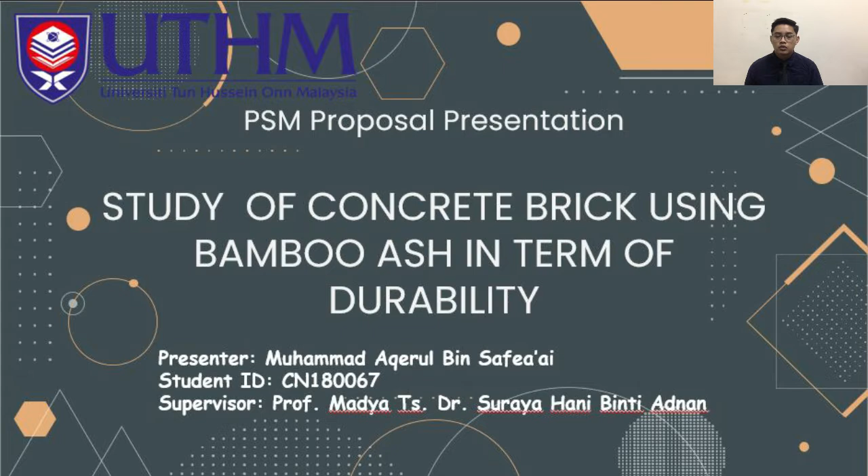Chapter 1 is the introduction. Background of study. This study is actually to reduce the use of cement in the construction industry. Bamboo is one of the materials that has been tested as a replacement or additive to cement, as we can reduce the contaminants to the environment. Researchers have been inspired to do more to protect the atmosphere by the idea of environmentally friendly technology in the most developed countries.

Using waste material as alternative building material has become a common way to solve the environmental problem. Bamboo was selected for its excellent properties, including a modulus of elasticity that is very close to that of concrete, susceptibility to water volume change, and increased ultimate tensile strength.

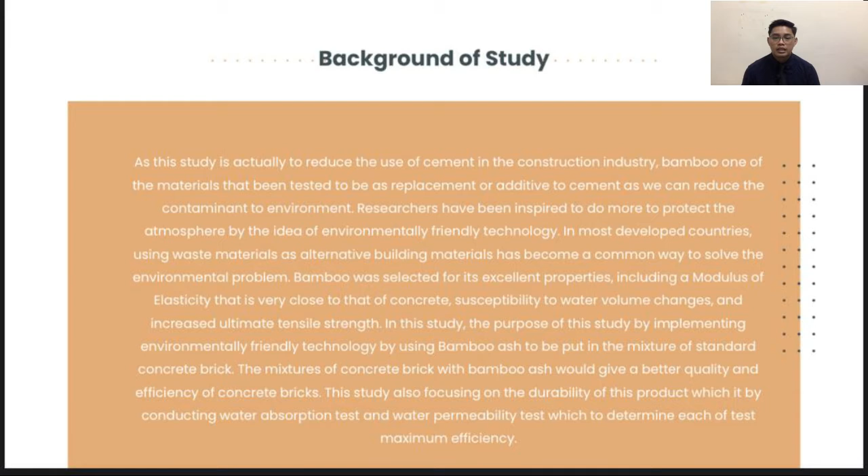The purpose of this study is implementing environmentally friendly technology by using bamboo ash in the mixture of standard concrete brick. The mixture of concrete brick with bamboo ash would give better quality and efficiency to concrete brick. This study also focuses on the durability of this product by conducting the water absorption test and water permeability test, which can determine each test's maximum efficiency.

Here is the problem statement. First, the process of cement is the main thing that affects the environment, as it is a source of carbon dioxide emission during production. Second, concrete brick production also gives a wide opening to another problem of solid waste due to demolishing buildings, which leads to increasing debris that is not safe for the environment.

The third one, durability of concrete brick can be upgraded with many types of additional material such as plastic and others. To change the innovation a bit, the use of bamboo ash would increase the durability of concrete brick, since plastic waste can also affect the environment. So the main thing of the problem statement is to reduce the use of cement and also to reduce the waste due to demolishing buildings. And lastly is to increase the durability of a concrete brick.

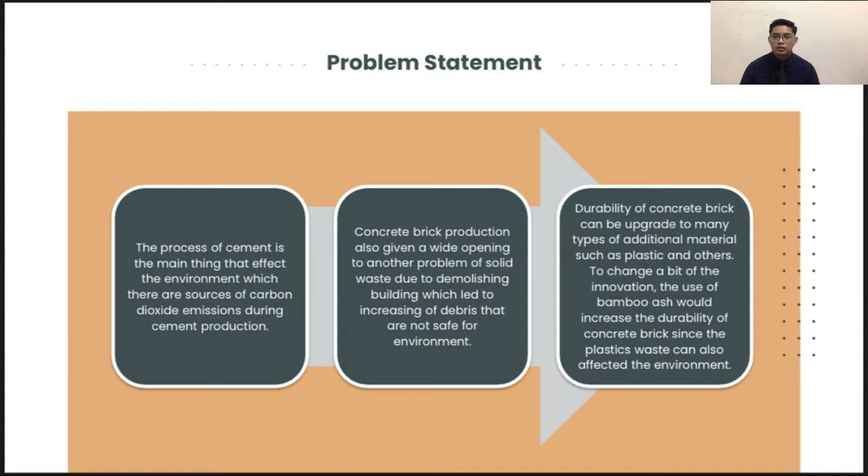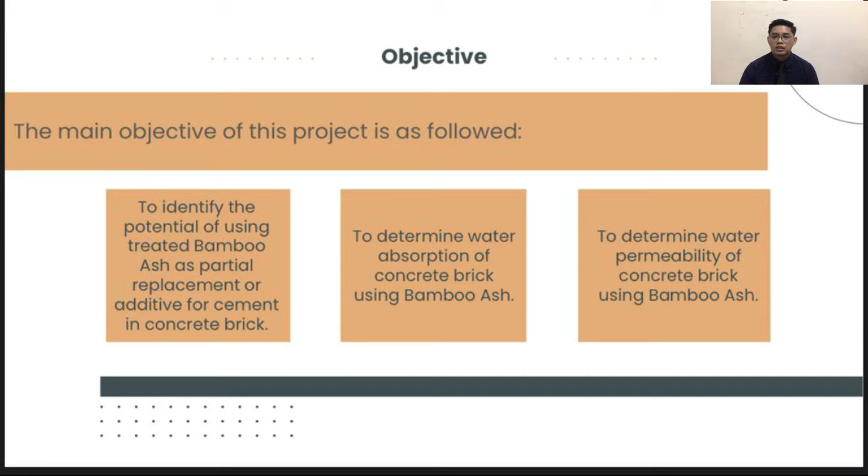As for the objective, there are three main objectives of this project. First, to identify the potential of using treated bamboo ash as partial replacement or additive for cement in the concrete brick. Second, to determine water absorption of concrete brick using bamboo ash. And last, to determine water permeability of concrete brick using bamboo ash.

For the scope of study, this research involves three main phases: material properties, mix detail and sample preparation, and the last one is the testing process. The bamboo ash was treated and separated into several percentages. The preparation material includes cement and sand as the standard design mix.

Next is mix detail and sample preparation. In this study, a concrete mold was used with different bamboo ash ratios. The same ratio of water and sand is used, but different percentages of bamboo ash and cement. The design mix of bamboo ash concrete brick is based on standard design. Last is the testing process. The specimen was compacted and cured for 28 days. Then the specimen will go through the water absorption test and water permeability test.

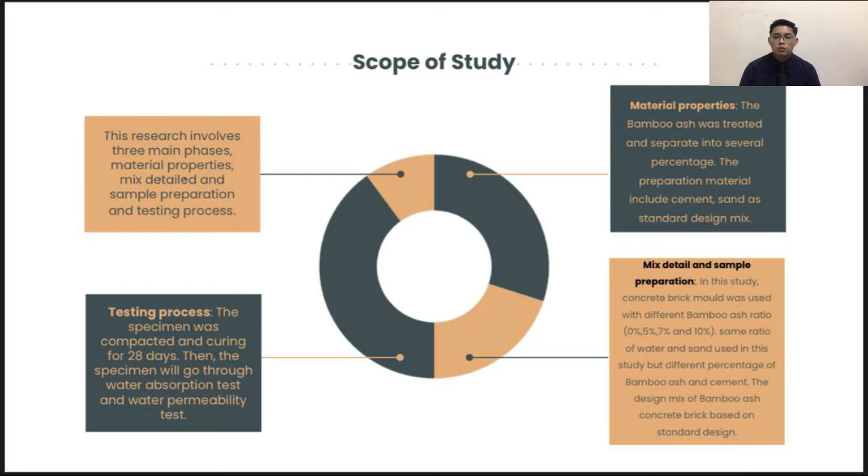As for the significance of study, the use of agro-industrial byproducts as possible substitute construction material is practiced in the construction industry in many countries due to rising raw material costs and the continued depletion of natural resources. To implement agro-industrial material for construction, bamboo would be one of the best materials, such as raft foundation, bamboo fiber, and bamboo ash.

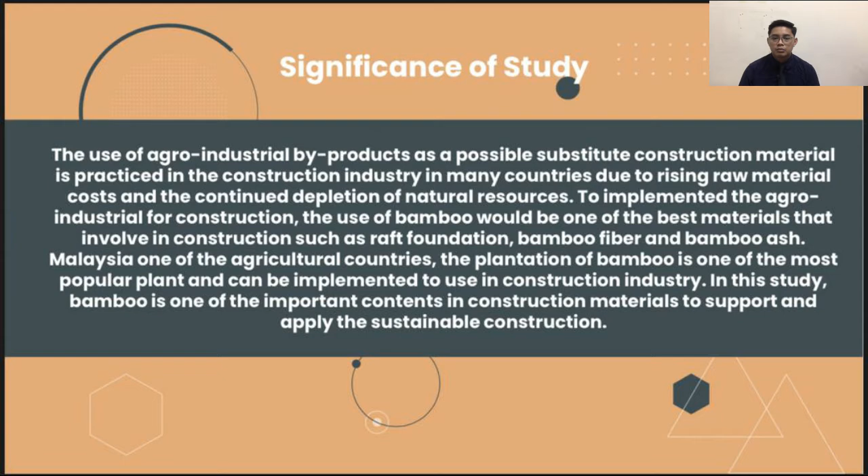In Malaysia, one of the agricultural countries, bamboo is one of the most popular plants and can be implemented for use in the construction industry. In this study, bamboo is one of the important contents in construction material to support and apply sustainable construction.

Jumping to chapter 2, literature review. Here is the summary of the literature review. Conventional concrete brick made with Portland cement and fine natural aggregate suffers from several weaknesses. The application of sustainable construction using friendly natural material is now developed. To overcome this deficiency and apply sustainable construction, new advanced concrete technology has been proposed.

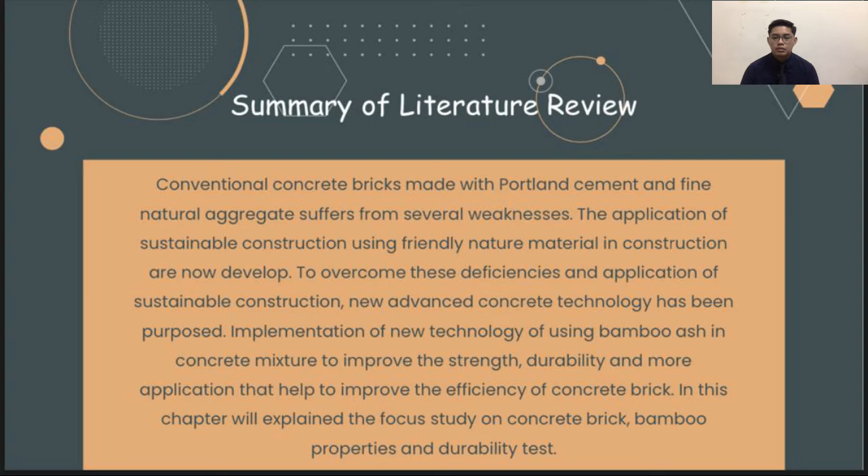Implementation of new technology using bamboo ash in the concrete mixture improves the strength, durability and more applications that help improve the efficiency of concrete brick. In this chapter, we explain the focus study on concrete brick, bamboo properties and durability tests. The first focus of the literature review is concrete brick. Concrete bricks are mainly used as a construction material for walls and fences.

It is also known as a concrete masonry unit. A concrete block is one of many precast concrete building items. The word precast refers to how the bricks are shaped and hardened before being used. Most concrete bricks have one or more hollow cavities, and the sides may be smooth or patterned. In the construction of buildings, concrete mortar is used to tie them together. Here are several types of concrete brick: hollow concrete brick, autoclaved aerated concrete brick, solid concrete brick, lintel brick and paving concrete brick.

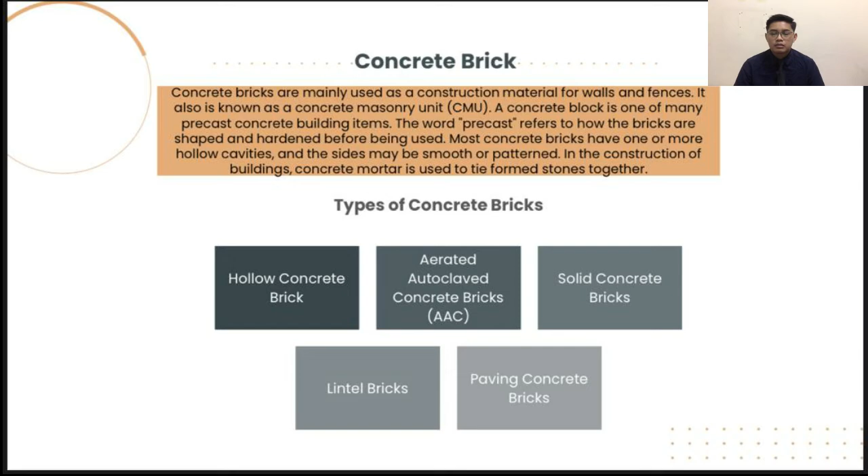In terms of durability for concrete brick, it refers to the ability of concrete to withstand considerable loss in quality when subjected to environmental effects. According to T V Reshmaa, Manjunathaa and Bharatha, concrete infused with nanoparticles is very resistant to chemical attack. Furthermore, the use of polypropylene fiber improves chemical resistance even further. Along with its resistance, the concrete maintains its compressive strength even after chemical exposure. This means that adding additives to concrete could lead to a good result in durability.

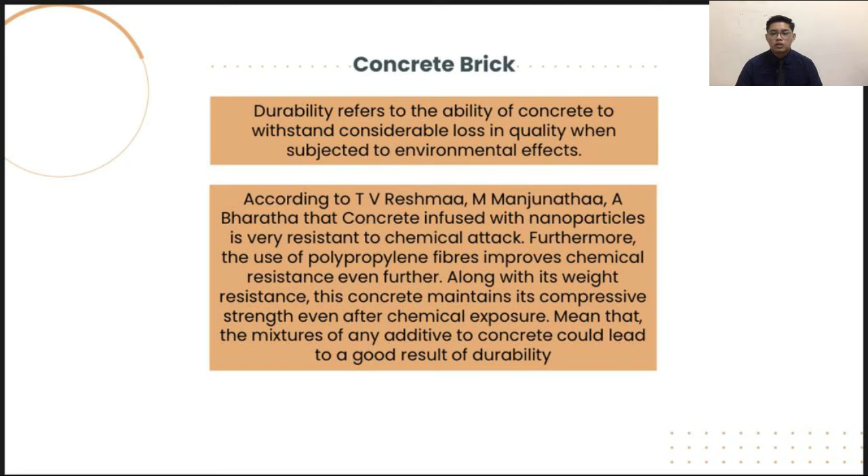Next focus in the literature review is bamboo ash. Bamboo as a sustainable construction material. According to a study conducted in the construction industry, a bamboo envelope outperforms a traditional brick and reinforced cement building. And because of its cost effectiveness and environmental friendliness, it may be a significant substitute for steel in concrete reinforcement. Bamboo has a compressive strength greater than brick, concrete and wood, as well as a tensile strength that rivals steel.

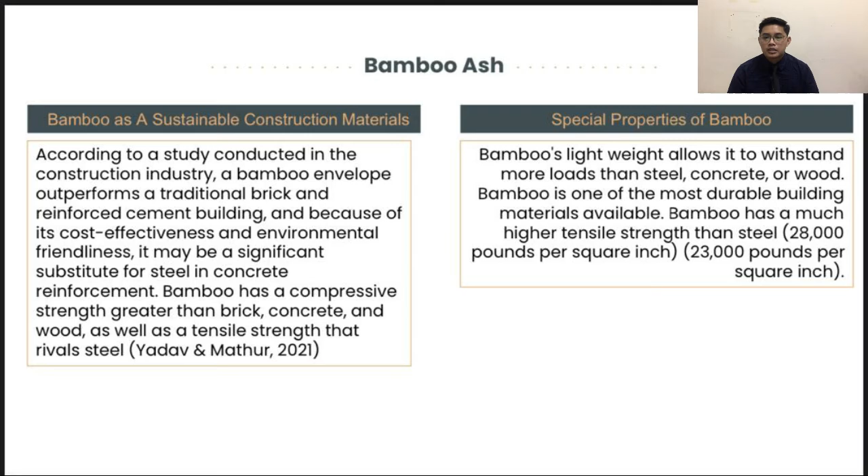Next one is special properties of bamboo. Bamboo's light weight allows it to withstand more loads than steel, concrete and wood. Bamboo is one of the most durable building materials available. Bamboo has a much higher tensile strength than steel.

Next focus in the literature review is laboratory testing. This is a must in a study. The main reason laboratory testing is important is that it can determine the properties and durability of concrete brick using bamboo ash. There are several tests involved in the study, which are sieve analysis, slump test, and durability test, which is split into two: water absorption and water permeability. But we focus on the durability of the concrete brick test.

First one is the water absorption test. The specimens are dried in an oven for a given time and temperature before being put in a desiccator to cool for the water absorption test. The specimens are measured as soon as they have cooled. They are then immersed in water for 24 hours or until equilibrium is reached, usually at 23 degrees Celsius.

Next one is the water permeability test. The permeability of cement, mortar or concrete is especially important in structures that are meant to hold water or come into contact with water. Aside from functional considerations, permeability is also closely related to the durability of concrete, particularly its resistance to progressive deterioration under severe climate exposure and leaching due to prolonged water seepage, particularly when it contains aggressive gases or minerals in solution.

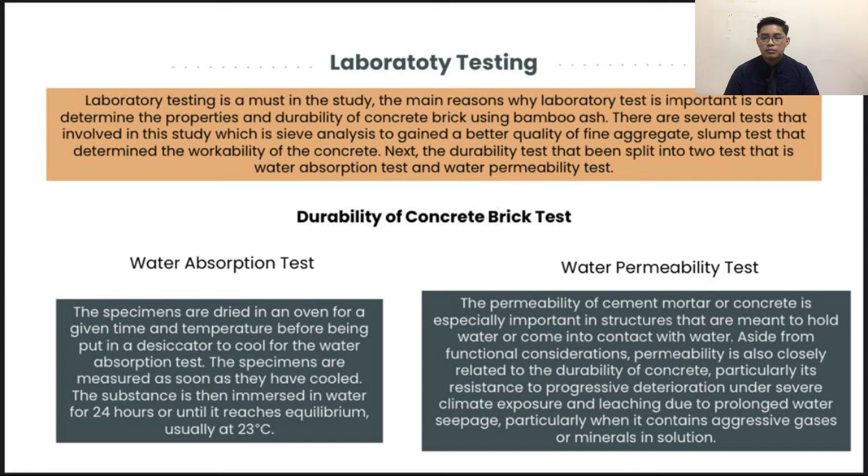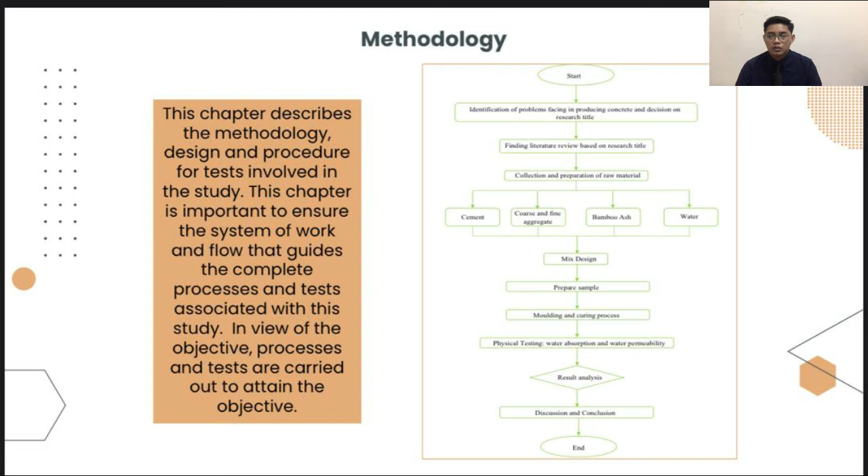Going on to chapter 3, the methodology. The chapter describes the methodology, design and procedure for the tests involved in the study. This chapter is important to ensure the system of work and flow that guides the complete processes and tests associated with the study. In view of the objectives, processes and tests are carried out to attain the objective. As we can see, here is the flow chart for the methodology and the flow for this study.

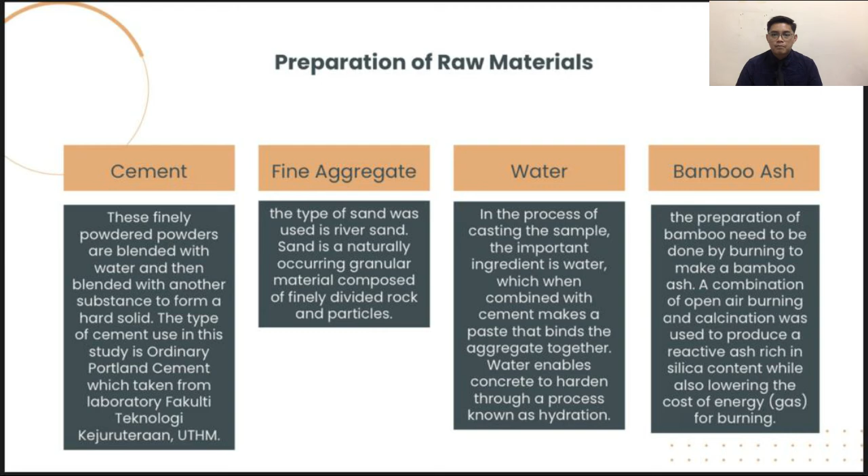First of all, preparation of raw materials, which include cement, fine aggregate, water and bamboo ash. Each of these raw materials needs to be prepared before designing the sample. Next one is the mix design using the DOE method, sample preparation and curing. For the mix design, the DOE approach is currently a standard approach of mix design in the United Kingdom. Depending on the type of cement and aggregate used, this method uses the relationship between water-cement ratio and compressive strength.

For the sample preparation, as we can see in the table, there are two tests that we held in this study, which are water absorption and water permeability. For the mix design, we are designing 0% bamboo ash, 5% bamboo ash, 7% bamboo ash and 10% bamboo ash, and the total number of specimens is 24.

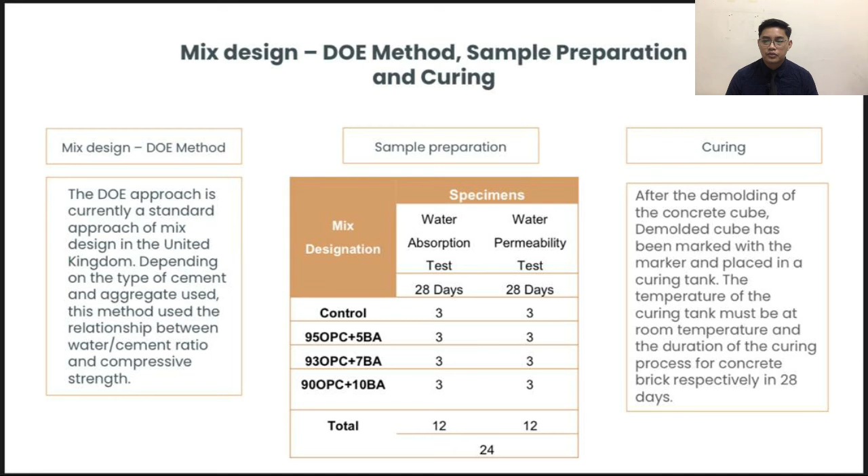Lastly, curing. After the demolding of the concrete cube, the cube is marked with a marker and placed in the curing tank. The temperature of the curing tank must be at room temperature, and the duration of the curing process for the concrete brick is 28 days.

Last one is laboratory testing. First one is sieve analysis to obtain a good quality fine aggregate for the concrete brick mixture. Second one, the concrete slump test is a measure of workability or fluidity of concrete. It is a direct measure of consistency or rigidity of concrete. A slump test is a method for determining concrete consistency.

So the two main tests are, first, water absorption. Water absorption is determined by testing according to BS 1881-122:2011, and it's calculated from the weight per unit volume difference between saturated and dry units. To have a good result, the sample concrete brick has to be cured for 28 days.

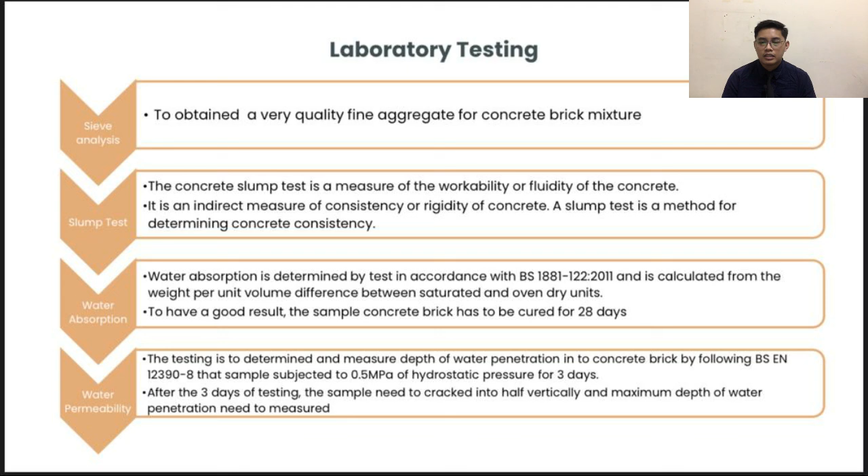And the last one is water permeability. The test determines and measures the depth of water penetration in the concrete brick following BS EN 12390-8, where the sample is subjected to 0.5 megapascal of hydrostatic pressure for 3 days. After the 3 days of testing, the sample needs to be split in half vertically and the maximum depth of water penetration needs to be measured.

Last but not least for this study is the expected result. This study will test 24 specimens for water absorption and water permeability tests. Both tests will use 28-day cured specimens. The ratio for the concrete brick will be 1:3:6 for the control, and for the other mix designs it is 95:5, 93:7 and 90:10.

As for the expected result, it will be able to identify the potential of using treated bamboo ash as a partial replacement or additive for cement in the concrete brick. Other than that, the focus on durability of the concrete brick using bamboo ash is achievable since this study is focusing on water absorption and water permeability.